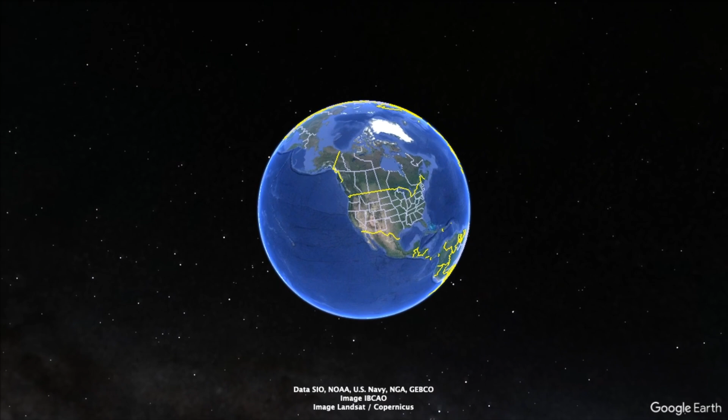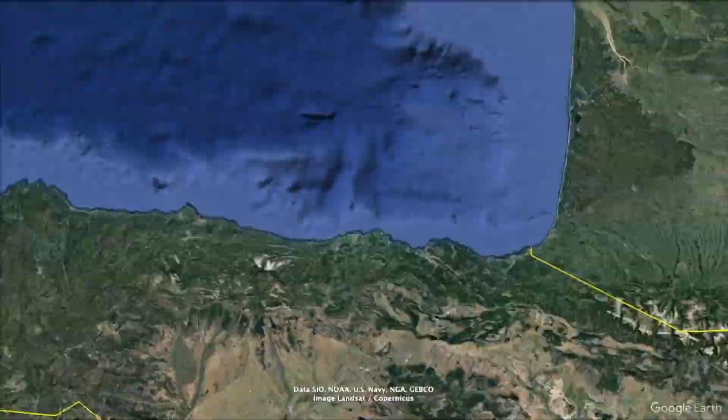From high above Vancouver, we head southeast down the Americas to Argentina and the home of last week's guest yacht, the Antares 44H. From here, we head northeast across the Atlantic to the western shores of France and the yards of Fountaine Pajot and this week's yacht, the innovative Aura 51.

Finally, we hop a little southeast again to the vineyards of Guigal and our wine pairing, Guigal Côtes du Rhône Rouge 2019. The Guigal family owns some of the most hallowed vineyards in the Rhône Valley and the world, and makes some of the most sought-after wines in the world.

The Guigal domain was founded in 1946 by Etienne Guigal in Ampuis, a small ancient village at the heart of the Côte-Rôtie appellation. It's overlooked by unique vineyards where vines and wine have been celebrated for over 2,400 years.

Following his arrival in 1924 at the age of 14, the founder went on to make wine for 67 vintages in the Côte-Rôtie and, at the beginning of his career, took part in the development of the Vidal-Fleury establishment. The soils are varied among the 80 growers that Guigal consistently works with, maintaining sedimentary limestone and granite soils with many pebbles and alluvial deposits.

The average yield is around 2.2 to 2.5 tons per acre, and the average age of the vines is 35 years. The wine experiences a traditional temperature-controlled fermentation and long maceration.

Guigal ages their Côtes du Rhône Rouge for 18 months in oak barrels. This expensive process results in a wine of unusual complexity with substantial and generous palate. 2019 is another excellent vintage for the Rhône Valley, with exceptional potential quality in both the north and south.

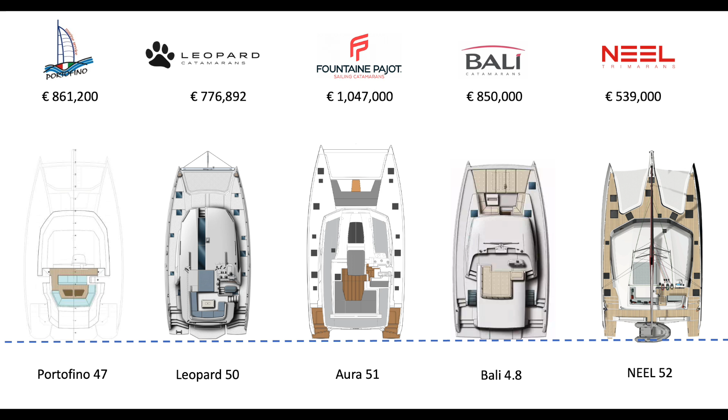And the Neel 52, again, they have retained a very nice fly lounge and full sun pad with a really nice ergonomically designed, updated mid-level bulkhead-mounted helm.

Heading into the saloons, looking across, you can see of course you've got the Neel, which really jumps out at you, but do recall you have a main deck master berth there, which is fantastic as far as I'm concerned. They've redone the layout of the main floor and, to me, really given it a sense of massive space, but it is a little deceptive in what you're seeing there.

Although I think probably on square footage they still have it on the bunch, save for the Bali 4.8 with its back swiveling door that turns, so they utilize the entire main floor for both galley, saloon and cockpit, while retaining something of an aft settee there outside. So there's something of an aft cockpit, but bear in mind they have that massive forward solid deck and a forward door into it, which I absolutely love.

Aura 51, they have done a fantastic job. They have a separated aft cockpit, which I prefer - keeps all the suntan lotion on the outside furniture, not the inside. Massive doors that give you a full open air experience into the saloon. A very, very large saloon. I mean, you can see how big that is.

And what I really love about it is they have both an island counter, and they have a settee, an L-shaped settee with the dining table. And then they have a really cute little angular settee there in the very front so that I don't have to always be sitting at the dining table when I'm relaxing. I really like that. They have a faux front cockpit, but they do have a little teak out there, a little table and whatnot. There's no access from the saloon out, and that's the only detractor there.

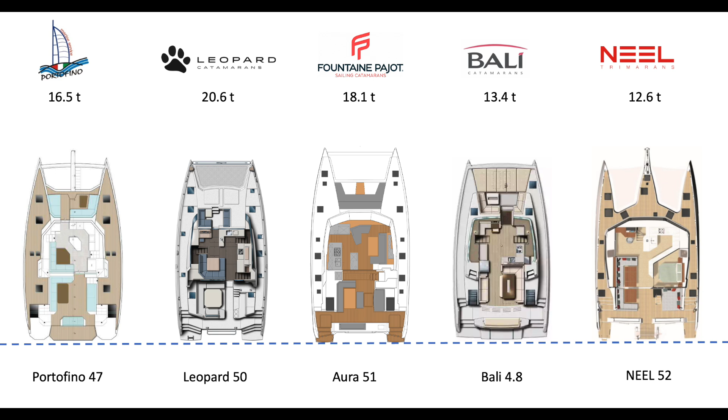Very exciting. Looking at the actual weights of these vessels: the Neel 52 comes in at 12.6 tons, which is extraordinary for the size of that platform. Then the Bali at 13.4 tons, the aluminum Portofino 47 at 16.5 tons, the Aura 51 at 18.1 tons, and the big girl, the Leopard 50, at 20.6 tons.

Okay, heading into the accommodations. Now this is where things get very interesting. You all know that in order to get Sylvia on board, my best bet is to definitely have a three-sided walk-around master berth. And this is what excited me about the Aura 51.

Look at this full hull master on the Aura 51, a massive layout on the port side hull with full three-sided access to that berth. External access out the aft, internal access into the saloon, a massive forward double sink head with that epic side-mounted shower they perfected, and a separate toilet area. Just a fantastic master suite.

And look at all the storage, you've got everything Sylvia could possibly love. On the other hull you've got three full berths: one aft, accessible from the outside, and two accessible from the inside. Of the three, one has full three-sided access.

Now Bali, again, they have something almost as spectacular, again a full three-sided, beautiful master hull. Really epic. But the Bali isn't, quite honestly, as pretty as the Aura 51. It has a whole bunch of really cool things, but if you're looking for sexy, the Aura 51 takes it there, I think.

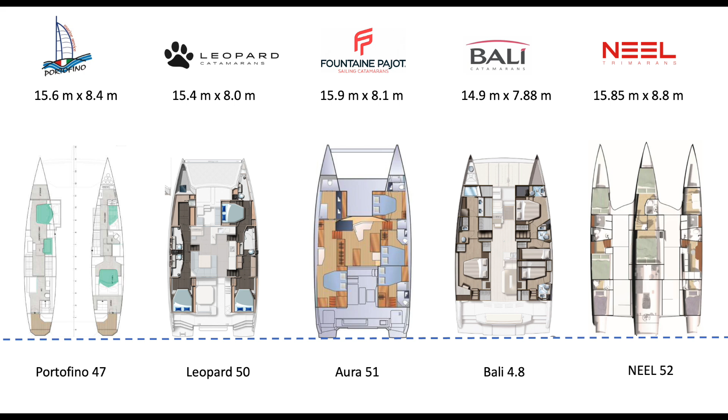The Portofino 47, again, this thing promises so much. My fingers are absolutely crossed that they deliver, because look what they've done in the port side hull: full master hull with a balanced style forward, three-side full access, athwartship walk-in closet in the front, aft bathroom with access out the back sugar scoop. That's something nobody else has, and it's a spectacular option in a boat of this size. And remember, this is all going to be in aluminum, so cross our fingers they come through.

Waterline length, again, the Fountaine Pajot. Beam is going to be, of course, the Neel at 28.87, but among the comparables, it would be the Portofino at 27. Draft, it's the Portofino tied with the Fountaine Pajot at basically 4.36 feet. Bridge deck clearance, I only found them for the Leopard and the Fountaine Pajot. This is a bit of a mystery number that you don't find readily, but it's the Fountaine Pajot at a very healthy 5.43 feet, or 1.66 meters. The overall lightship we already identified is the Neel at 12.6 tons.

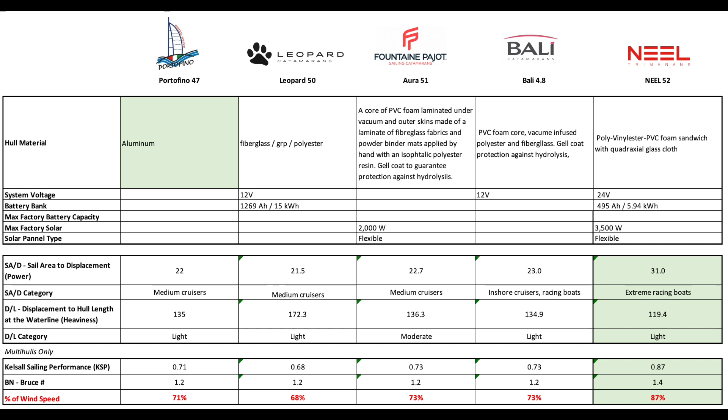Okay, getting into the more technical detail here, looking at hull materials as far as overall quality, it's, I suppose, a point of debate, but the bottom line is the Portofino's aluminum. It dents, it doesn't puncture, under the same load as fiberglass does. So the Portofino, by a long shot, would be the most robust hull here. Everybody else is about the same. Nobody in this group is using a balsa core. They're all foam cores. They're all using polyester. They may have a vinyl ester external layer or a skiff of it, some kind of water-resistant coating to save the polyester from blistering.

Generally speaking, these are polyester composite boats with a foam core and fiberglass, whereas the Portofino is aluminum. System voltages are all about the same.

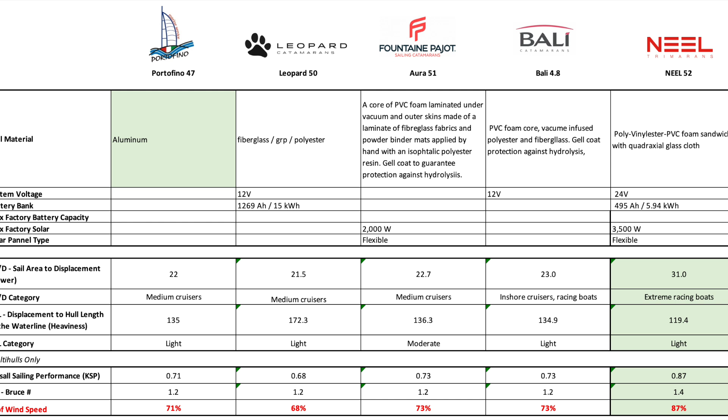The one that really stands out here would be the NEEL, with the maximum factory solar at a whopping 3,500 watts, thanks to that huge cabin top area they've got to play with.

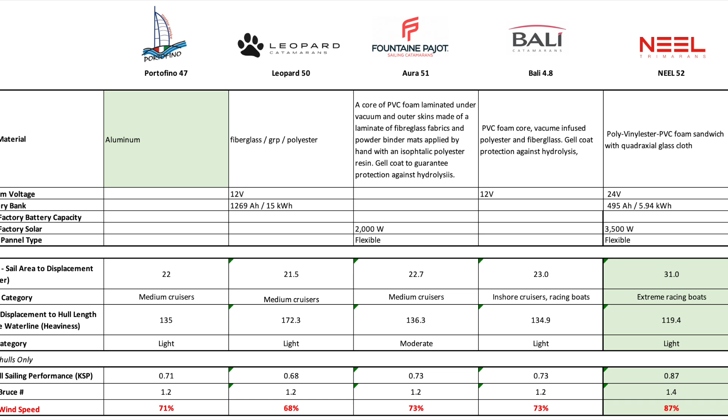Heading into performance indicators, sail area to displacement is an indicator of power. It's the NEEL at 31, next up the Bali at 23, followed by the Fountaine Pajot at 22.7, the Portofino at 22, and the Leopard at 21.5. Looking at displacement to hull length at the waterline, the lowest number wins. It's the NEEL again at 119.4, followed by the Bali at 134.9, then the Portofino at 135, the Fountaine Pajot at 136.3, and the Leopard at 172.3.

Heading into the KSP number, or what would be a comparable percentage of wind speed at 10 knots of wind, in the lead it's the NEEL at 87%, followed by a tie of the Fountaine Pajot and Bali at 73%, then the Portofino at 71% and the Leopard at 68%. The standout here, of course, is the NEEL, with a significant lead over the others.

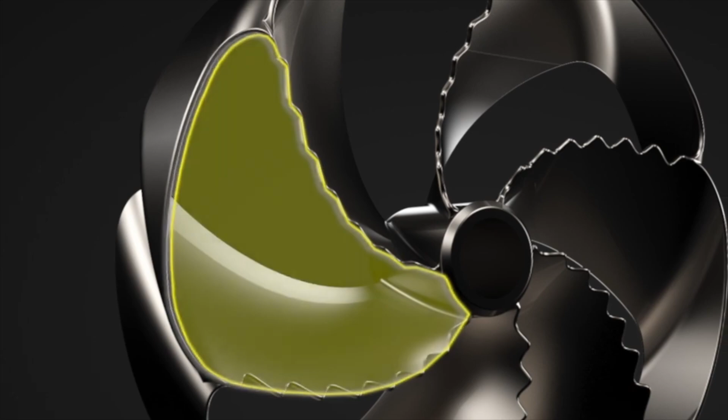Let's have a little naval gazing here. Today we're looking at a bionic propeller inspired by a propeller innovation from the Technical University of Berlin. BigRep industrial designer Florian Schaefer developed a bionic propeller model that combined 2 key bionic research principles to make a conventional design more efficient.

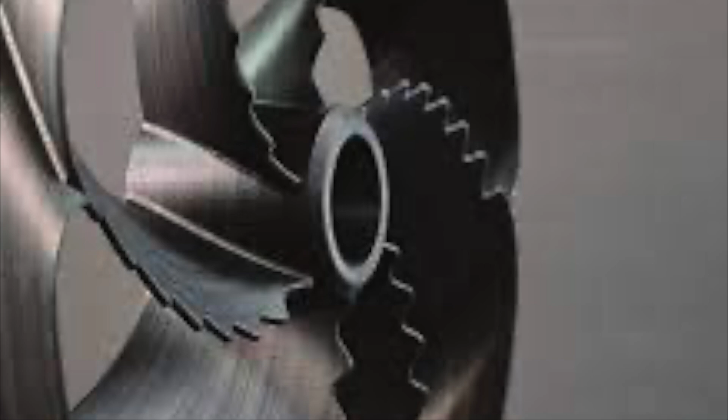The propeller design has loop ends with no end part, based on the pinions of bird wings, which when splayed out enable birds to glide with ease and low noise emission through the air. Furthermore, 6 ridges visible on the edge of each propeller blade are based on bumps along the fins of humpback whales. When the propeller is rotating, air travels faster through these ridges with less drag.

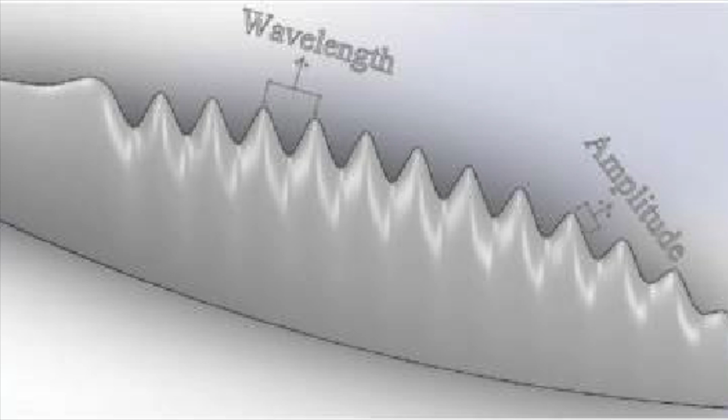This principle is the very thing that allows one of the largest mammals on Earth to move through water at seemingly incomprehensible speed, considering its weight. It's an aerodynamic principle that can be applied to wind turbines and propellers. The result is a propeller that reduces turbulence caused by air, or in water, cavitation. Tests with a computer vent designed this way revealed 30% less noise emission, and tested as a ship propeller, it raises thrust performance by around 19%.

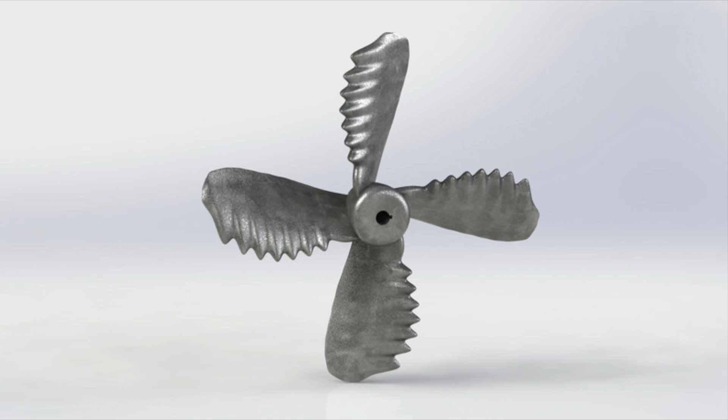Like the Berlin-based researchers who developed the loop principle propeller, more and more teams of researchers are discovering and applying bionic principles that make conventional designs more efficient.